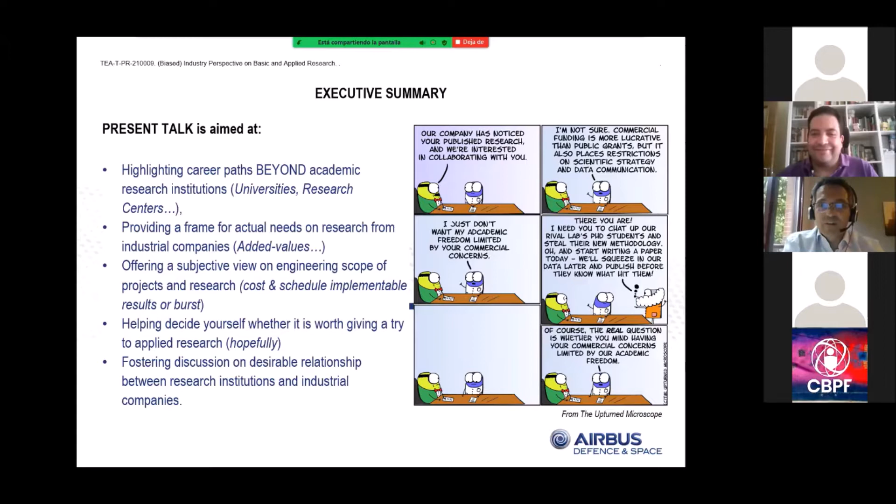That's more or less the different paths that seem to diverge when we're talking about research institution and private company research. Okay, so the talk itself has three main parts. First, it will be just a brief CV presentation from myself.

Later on we talk about Airbus, and Airbus, and Airbus—sorry for that, but the point is that I work in Airbus, and I'm proud of that. I want to share with you the experience of working for such a big and private company at the end.

The final part of the talk will just be a summary of the conclusions—again, personal conclusions, so it's very subjective, very biased. Okay, so let's start. Well, I'm 50 years old.

My professional experience is quite limited, because I've been working at Airbus since 2001. Now it's called Defense and Space Business Line. Before it was a division, before that a group, before that EADS. But at the end, it's the same company at all.

Before that, I did some 6 months after I finished my thesis, and I used to work at the Complutense University of Madrid as a technical researcher on railway EMC characterization, as Jose Miguel has already mentioned.

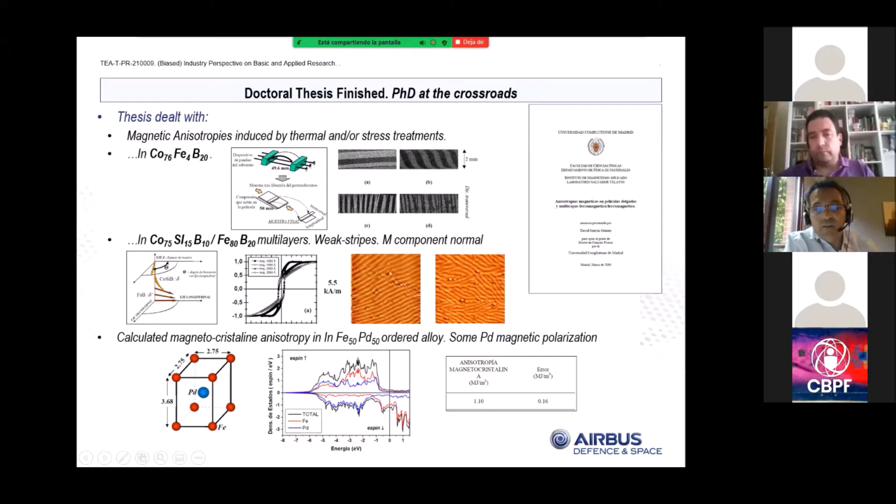After that, I can say that the period I spent there has been the most joyful years in my professional life, for sure, because of the people, the interest, the challenge, the travels, creating unique moments with very special people there, as you can see here, also in the audience, since they accompanied myself 20 years after that.

Once the thesis was finished, it was a period of uncertainty, and this uncertainty grew, and I had to make a decision about the future. There was a very limited time perspective that was, at the end, not very optimistic for continuing with the academic career. As I say, it was a pessimistic forecast on reaching an academic research career.

There was no clear postdoctoral position. I had just come back from France when I finished the thesis, so I was not in an easy position myself. And there was a personal feeling, by experience from other people, that there was a kind of non-correlation between academic merits and actual attainment of an academic position. That's hard, but it happens from time to time.

And the idea of jumping from one temporary contract to another in the near future didn't seem promising to me at that moment.

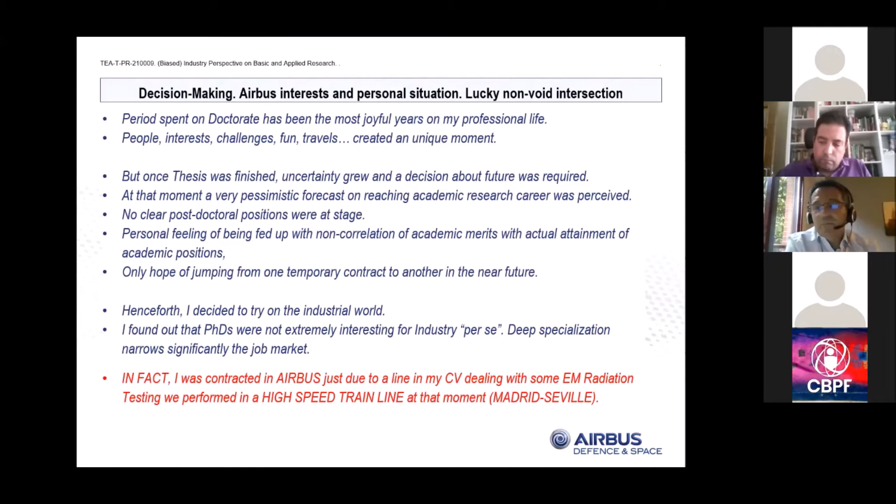So I decided to try the industrial world, thinking, well, I've got a doctorate in magnetism, extraordinary work, I will find a job very, very easily. The truth is it cost me 3 months at the end, but they were 3 difficult months.

What I can tell you is that PhDs are not extremely interesting for the industry per se, because at the end, this deep specialization narrows the job market.

In fact, as Jose Miguel has pointed out, I was contracted by Airbus just due to a line in my CV dealing with the electromagnetic radiation testing we performed on that high-speed train line. So, as I was saying, it was a lucky non-void intersection, and I started working at Airbus.

So let's talk about Airbus for a moment.

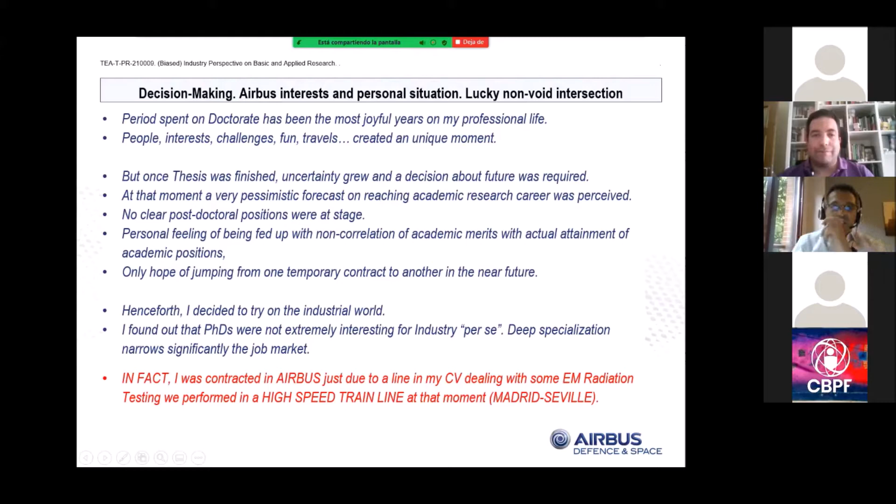Airbus is a big company that makes things that at the end fly in one way or another, in the atmosphere or beyond the atmosphere. These are the key figures of the company. It's for sure the largest European-based aeronautic and space company. It manufactures aircraft, helicopters, satellites, launchers like Ariane, electronics, security solutions, and services.

Workforce: we are more than 130,000 employees, 140 nationalities, over 20 languages spoken in the company, only one official language, which is English. World presence is 180 locations, and final assembly lines, the places where the final products are assembled and tested for flight and then delivered to the customer, are in Europe, America, and Asia.

As a summary of the company taken from the Airbus web page: more than 2,000 aircraft deliveries, around 2,000 helicopters also, a top 10 defense company, second largest aeronautical company in the world behind Boeing, self-financed research and development of 3 billion euros per year. We are committed to reducing CO2 emissions, and we've got around 30,000 patents. So, a big company at the end.

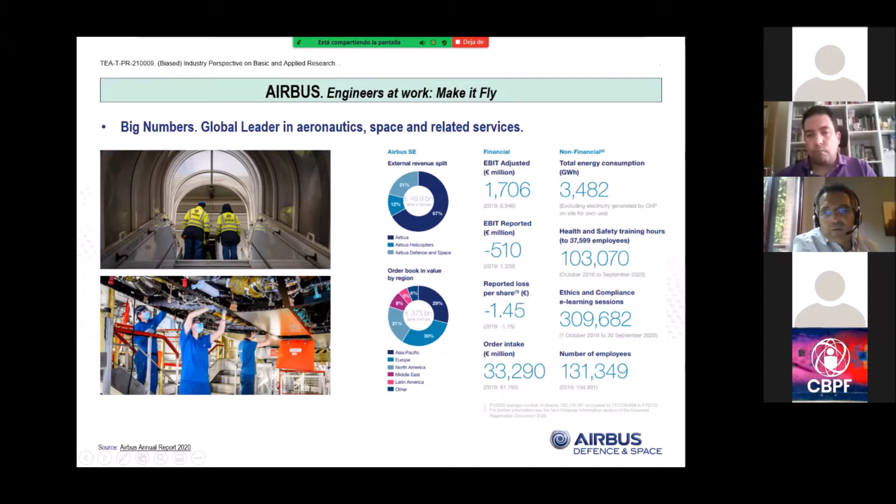There are three main lines of products within Airbus: Airbus Commercial, the big brother, let's say; Airbus Helicopters, 12%; and Airbus Defence and Space, where I belong, 21%. This is our market spread around the world.

Let's see the portfolio quickly. First is Airbus Commercial, which delivers all the transport category aircraft you are used to flying on, together with Boeing. These are the big families: the 220 together with Bombardier, the 320, 330, 350 which is new, and the 380. As you know, for the 380 we are not accepting any new requirements for new products.

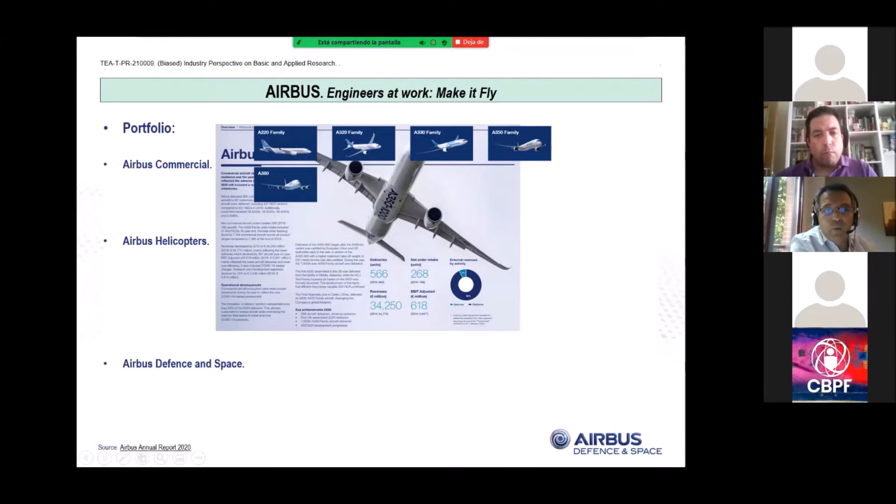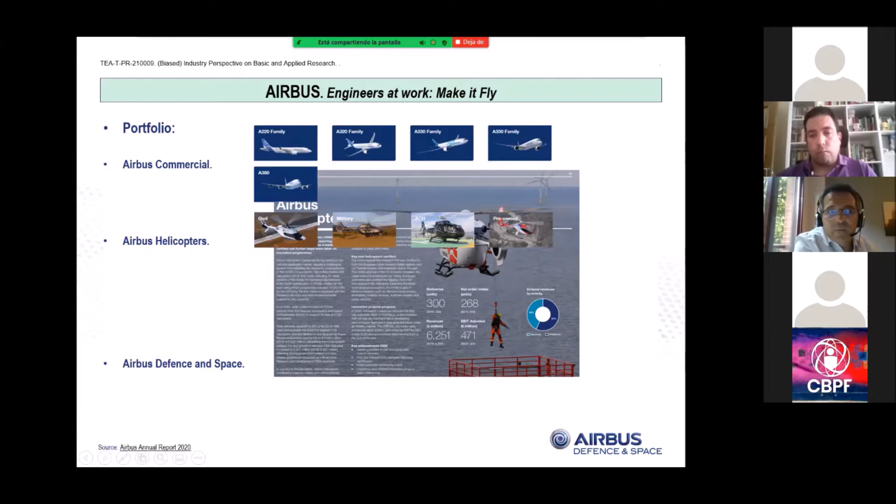So we are building just A380s that were already requested by customers. The Airbus Helicopter business line has produced civil, military, corporate helicopters, and has services associated with them. And Airbus Defence and Space, here you can see the Eurofighter.

These are the figures of the company. At the end, the portfolio is quite diverse: military aircraft, as you can see here, and security solutions, and system of systems approaches with the future FCAS program. And for sure you've got also different families of satellite production and services and equipment, and launcher products that we are developing. So this is the complete portfolio of the company.

Figures, I will go quickly through that. These are the revenues by each of the business lines. I want only to point out that our expenditure in research and development is around 3 billion euros per year, as you can see here.

On the business figures, you know it has not been a very good year, mainly for commercial aircraft, because of the decrease of traffic in general due to the pandemic. In helicopters and defense and space, we have more or less maintained the figures.

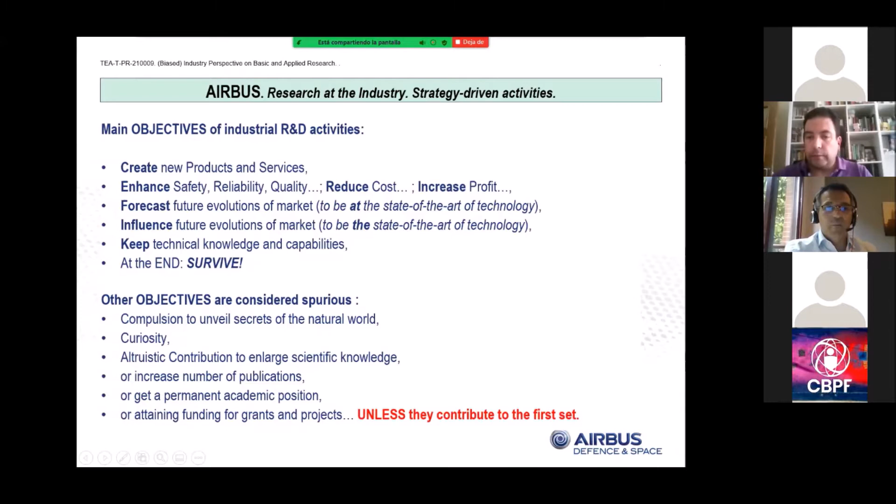Other objectives that are considered spurious include the compulsion to unveil secrets of the natural world, something very attractive from basic research, to understand why nature is as it is, curiosity, altruistic contribution to enlarge scientific knowledge, and other narrower objectives such as increasing the number of publications, getting a permanent academic position, or attaining funding for grants and projects. All these objectives are spurious unless they contribute to the first set, unless they contribute to the company's survival.

Also, this research in the industry is driven by the strategy of the company, but it also has some alignment with big values that are being developed and pursued in the long run, even at the UN forum, like fostering education, gender equality, decent work, industry, innovation, and infrastructure. For sure, maintaining peace, taking action on climate, being responsible, responsible consumption and production, recycling efforts, and all that.

So these are big words, what I mentioned up to now. But now let's focus on how we articulate that.

At the end, as any company with similar structure, we've got mapping of technology with road mapping, just to deliver and focus on planning the development of different technologies. This planning and road mapping are inputs, apart from inputs taken by the strategy of the company, and the needs and resources of the divisions. And at the end, they lead to several research lines.

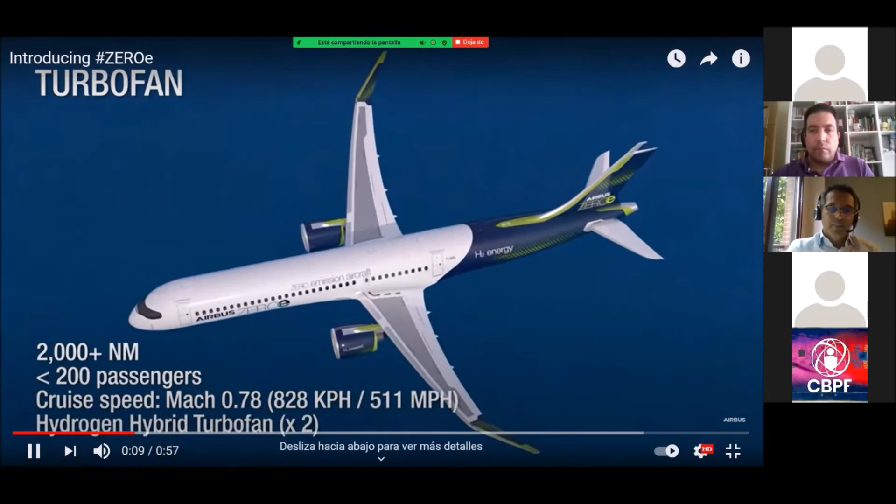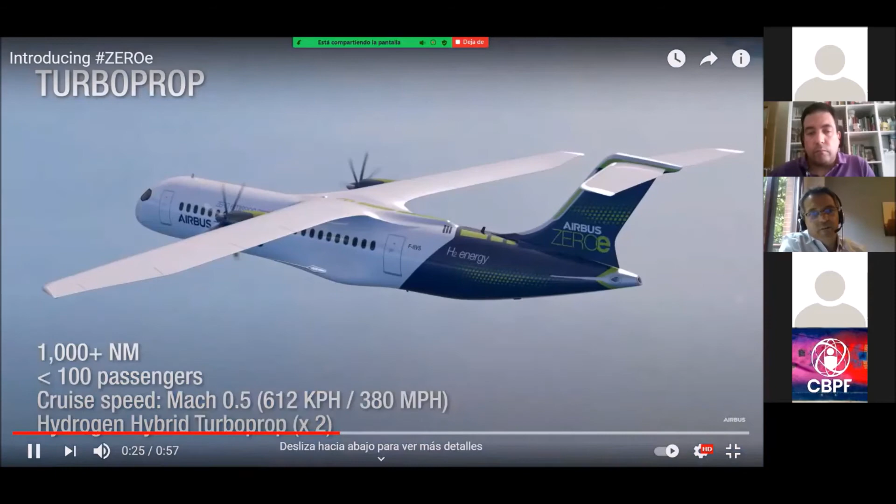These are different models that are being investigated. This is the roadmap for the use of hydrogen towards aircraft in the future. The different models are just being investigated now.

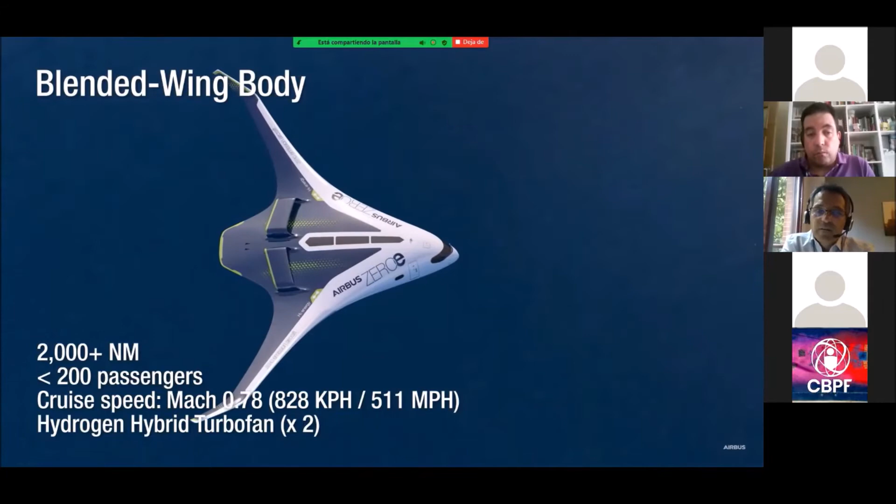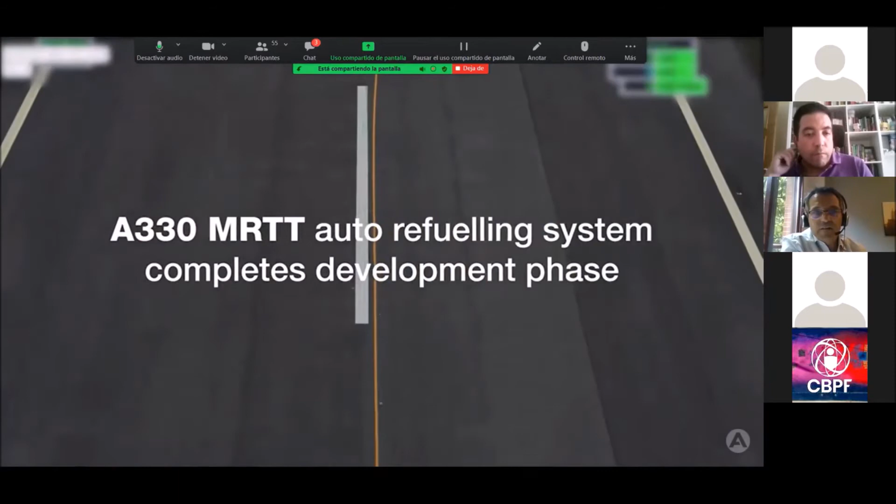Another example of research, focused on the division I work in, is what we call automatic air-to-air refueling. We build aircraft that are able to deliver fuel to other aircraft while in flight. This is what we call the A330 MRTT.

It has three positions to dispense fuel. One of them is the so-called boom system. What we have developed up to now is automatic recognition of the fuel receiver, making this operation fully automatic, increasing safety, either with big or small aircraft.

This is another example of a successful research and development initiative. We are just going to certify this year.

Okay, sorry for the music.

Now going to my personal experience. I don't want to bore you, just to the permissible amount. So...

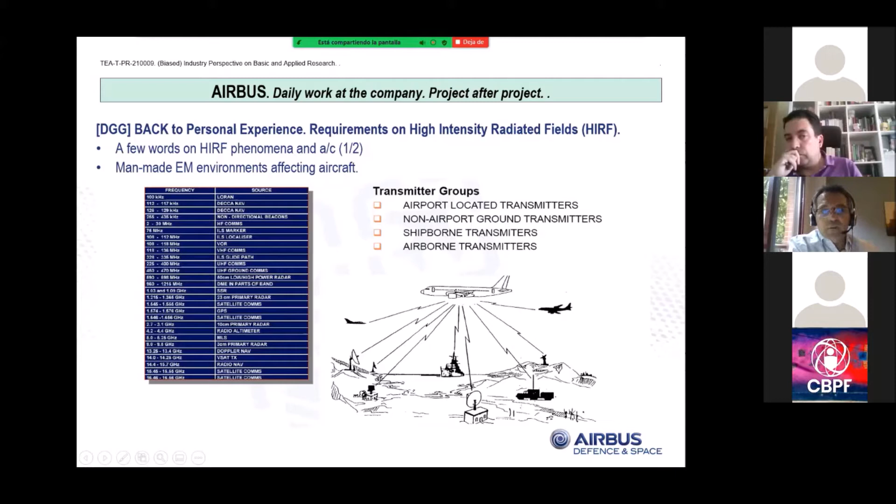This means flying safely whenever it is submitted to electromagnetic fields created by other aircraft, ships, terrestrial or ground stations, near the airport or out of it. To do that, you need to certify the aircraft can fly in a HIRF environment, which depends on the scenario the aircraft will be immersed in.

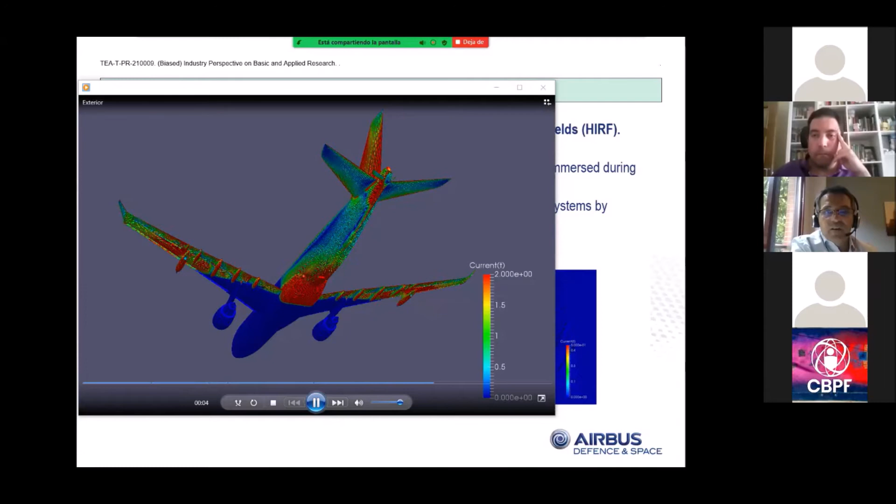At the end, we need to protect the aircraft from the currents that are induced along the structure and systems whenever an electromagnetic field approaches the aircraft. You can see here superficial currents produced by a plane wave illumination of the aircraft, seen from the exterior, and from the interior it's the same induction.

But here you can see cabling inside the aircraft, and you can see it also changes color, meaning there are induced currents in this cabling. These currents arrive at the equipment and can stress the proper behavior of the equipment by adding a noisy environment.

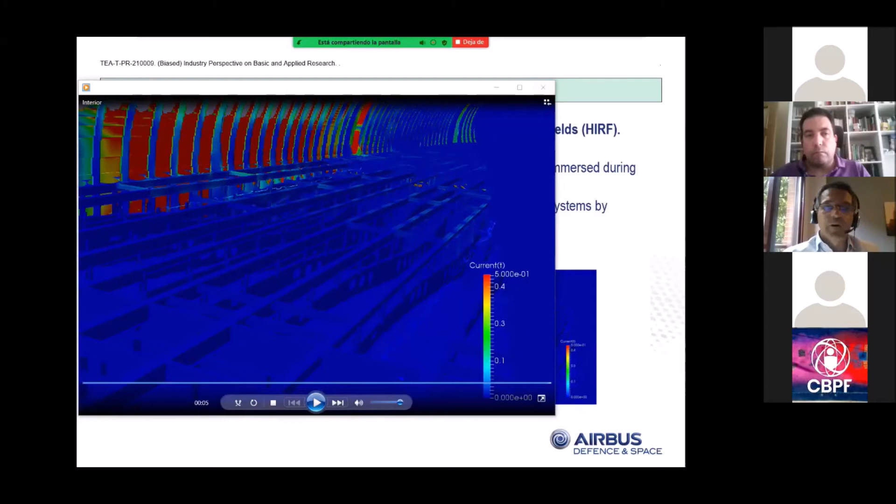Another thing more spectacular is the protection we need to provide to aircraft systems and structure against lightning. I'll say a few words about the lightning phenomena and its interaction with the aircraft. First, it seems an aircraft is a big, complicated system, but when you see this, you see how small an aircraft really is.

At the end, you need to protect the aircraft and make it robust enough to continue flying, as this aircraft does, even facing such a spectacular lightning impact.

Something we can say about lightning: it's mainly produced in thunderstorms, cumulonimbus clouds, where very dynamic processes with strong winds create a lot of friction between particles and form very different charge centers within the cloud that need to discharge somehow. The way they do that is through lightning.

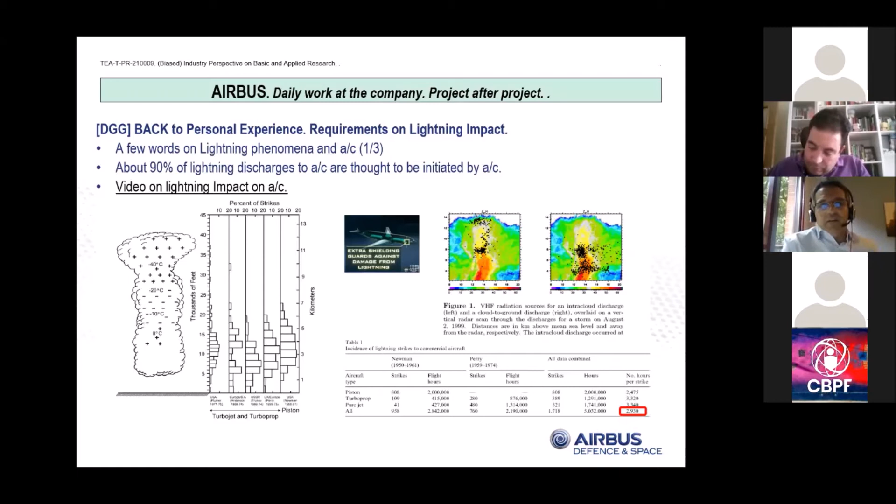Between Venezuela and Colombia, it's quite a funny phenomena, and a significant producer of ozone to the atmosphere. So to continue and finish with lightning, I would say that in order to design our aircraft and protect it against lightning, we need to put some numbers to the lightning phenomena, and these are the numbers we put to it. It's just curiosity for you to know, lightning for aeronautical engineering, something like that.

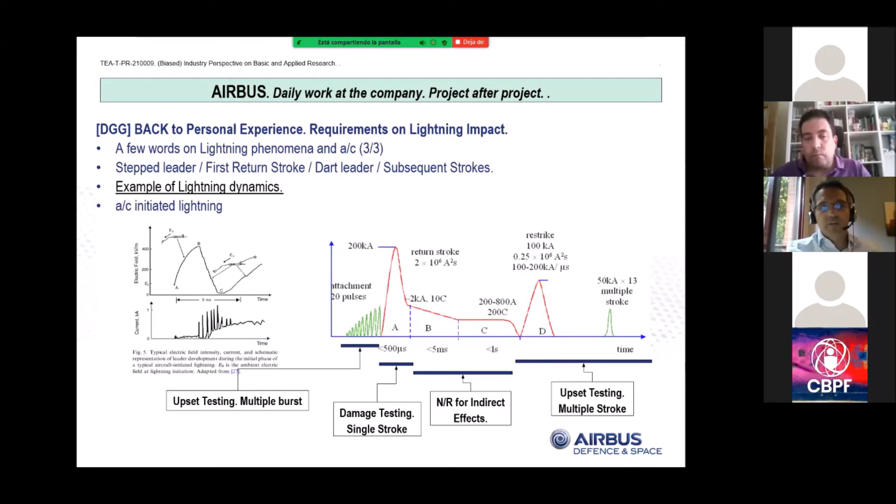We need these numbers in order to protect and design against this number, and to certify against this number with the authority. This is an example of the lightning dynamics, just for you to know.

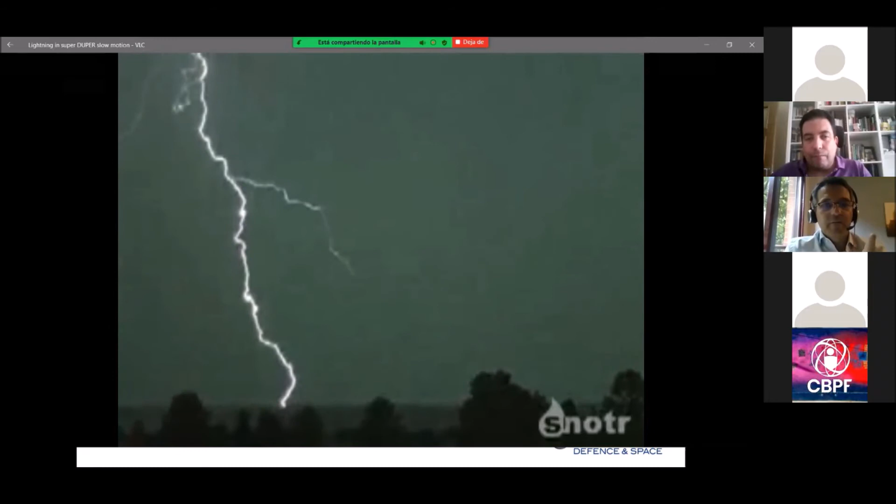There is an increase in the luminosity, which means that there are other charge centers that use the channel just to discharge. This is a lightning phenomena, and we need to put an aircraft on the picture, and design it just to withstand all this energy that is being transferred through the aircraft.

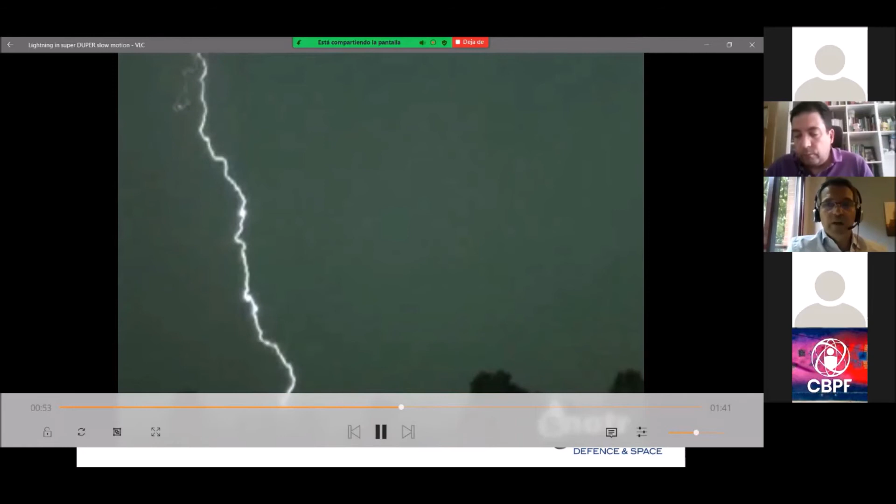What happens when a lightning hits an aircraft? Well, it can happen two things, what we call direct and indirect effects. Direct effects are all the damage produced by just the passing of the current through the lightning current through several parts of the fuselage, from one point, the entry point, to the exit point.

You need to be sure that you are not creating an ignition hazard for the aircraft, blown up with a full tank. For sure, they create very strong magnetic forces that tend to narrow together the distance between nearby conductors. And for sure, it does create hot spots and all this damage that needs to be repaired.

When you are using, instead of aluminum fuselage, carbon composite aircraft, which is less heavy than the aluminum aircraft, you need to protect it against serious damage of the carbon fiber itself, and you need to protect it with several metallic meshings, just to avoid creating some holes even in the structure of the aircraft.

And for sure, you need to protect this. You need to avoid the creation of electrostatic discharges at the end of certain points of the aircraft, mainly if these points are within the fuel tank. Okay, you don't want to have it. These are what we call direct effects.

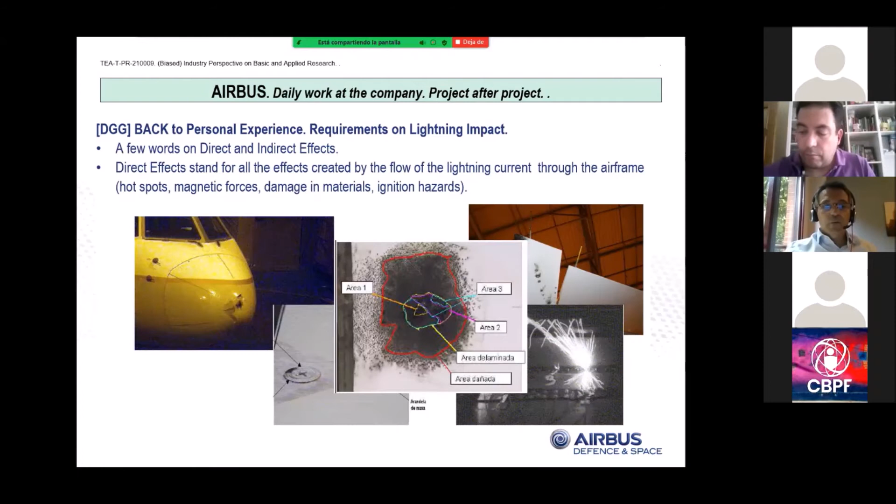In order to design properly the aircraft against this damage, what we do is identify the aircraft and divide it into different zones with respect to the probability each zone has of receiving the initial impact of the lightning. That's what we call zone 1, zone 2, or zone 3. Depending on the zone, you have to design in a proper manner for the structure to deliver, without any serious damage, this current from one side to the other side of the aircraft.

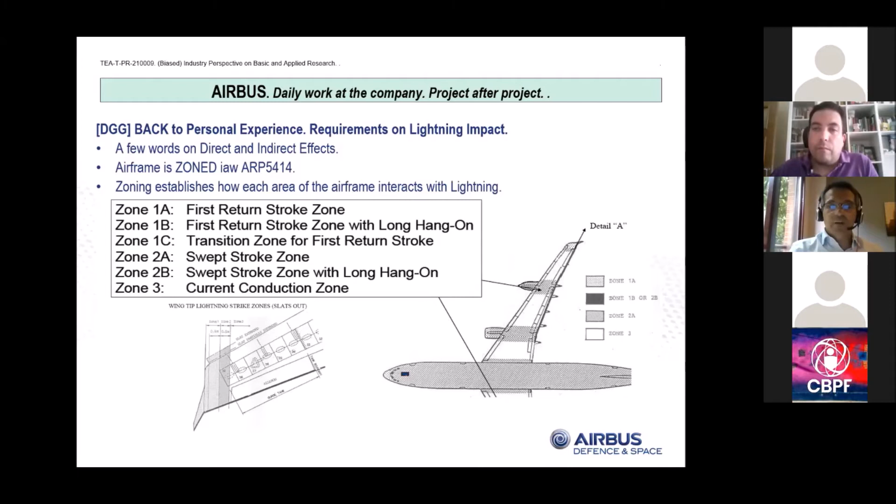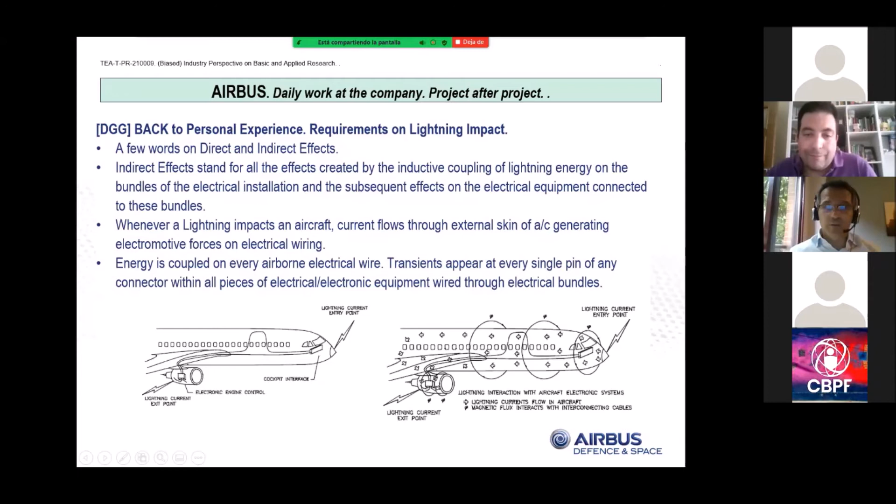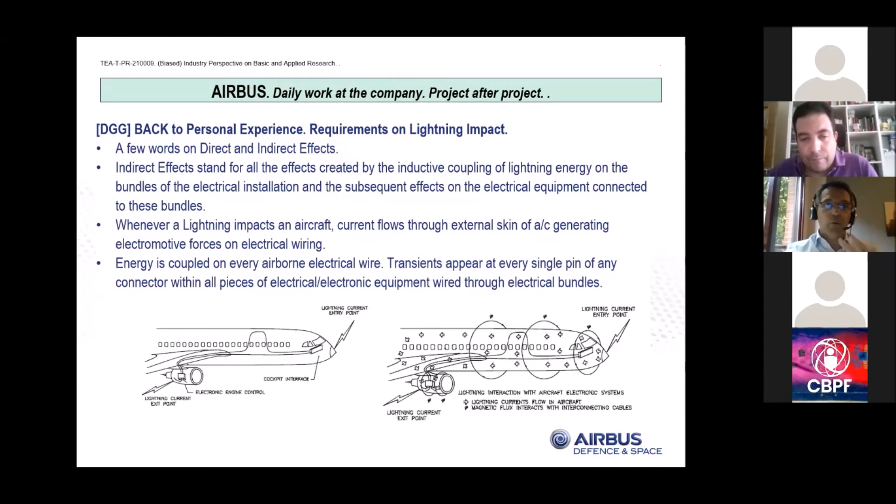Another thing about lightning is what we call the indirect effects, which has a lot to do with electromagnetic protection also. Indirect effects are created because of the very high induction that a quite fast changing current passing through the aircraft produces. Whenever lightning hits an aircraft, a very fast changing current passes through the fuselage. It creates a magnetic field that changes very quickly with time, and an electric field also, creating a very inductive source of noise into every single piece of electrical wiring in the aircraft. So at the end, you are producing a lot of electromotive forces within the aircraft, and you need to protect every piece of equipment against all the transients delivered to it because of the lightning impact. This is what we call the indirect effects.

Finally, I would like to talk about how we protect against portable electronic devices. Every passenger now carries electronics on board an aircraft, such as mobile phone, tablet, or laptop. There's the funny instruction to put the device in airplane mode or switch it off in certain flight conditions.

The people in charge of giving certain recommendations and limitations are ourselves in the electromagnetic protection area. You have to take into account, for example, a simulation of a GPS signal being produced within the aircraft, which through the apertures of the aircraft can produce interference on GPS receivers located around these areas. Having such an internal source of interference may cause the aircraft to be confused about where it's actually flying. So that's an important issue.

So what might be happening during safety briefing to passengers in commercial flights? Let's have a look at that.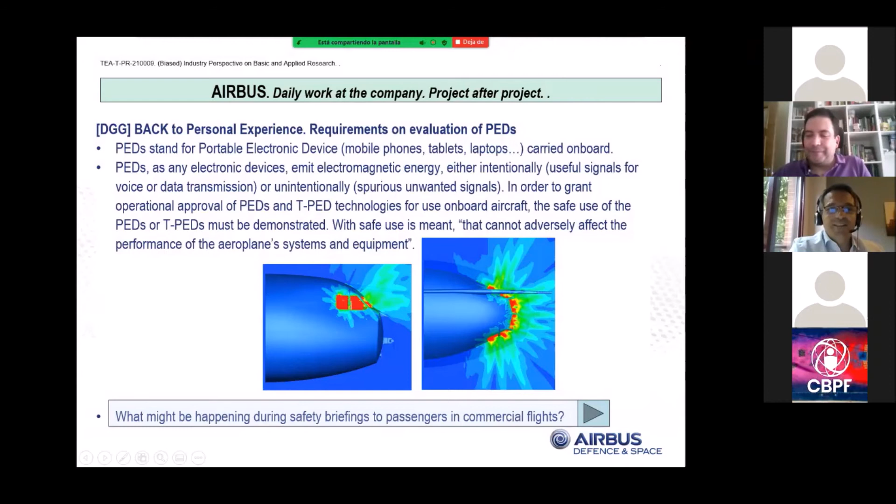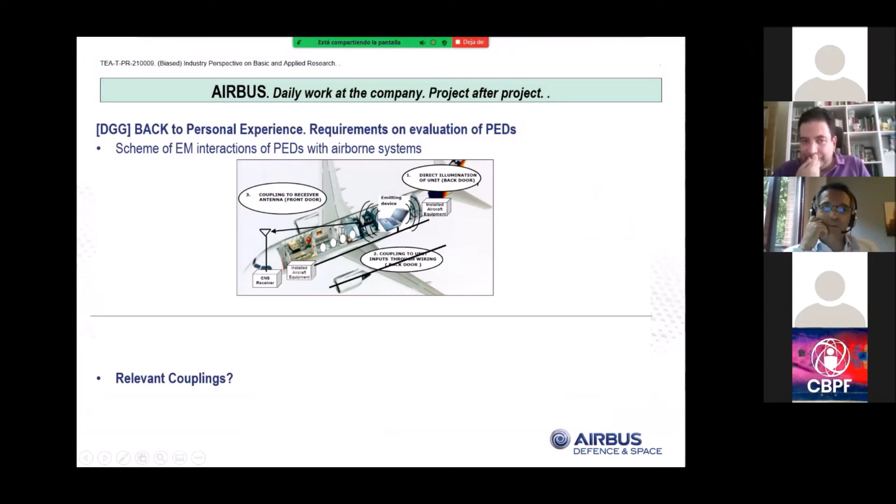Let's put it again. In order to check whether portable electronic devices affect our airborne systems, we divide the coupling it can have into front door and back door, meaning the front door stands for PED emissions and airborne victims.

The PED emission could be intentional, and they are intentional when we are talking about Wi-Fi, 4G, 5G, or whatever, or Bluetooth up to a point. These are intentional radiation from the PED that may affect the antenna of the aircraft.

Whenever the affected system is an antenna, we characterize that as front door coupling, because the antenna is designed to receive energy, even very small amounts of energy, for the equipment installed behind the antenna to process and make use of this information. So at the end we can have this kind of coupling, intentional radiation to antenna.

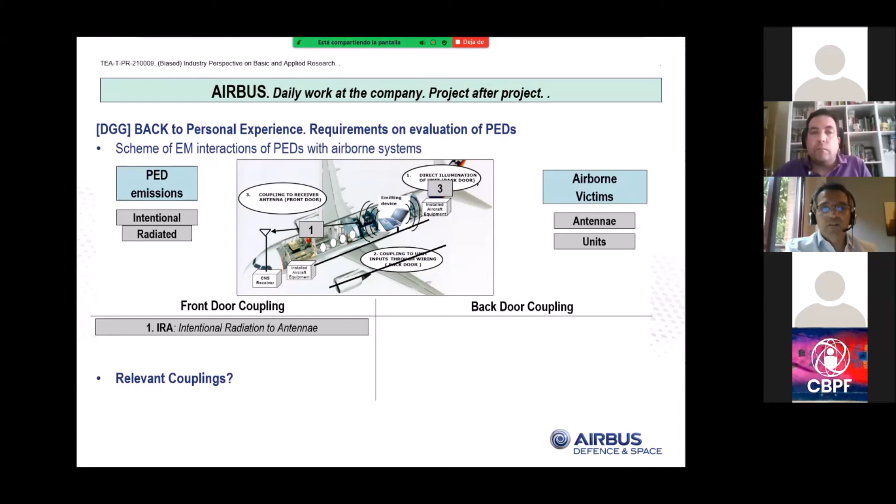If this intentional radiation goes to some units and equipment that has no antenna embedded or connected to it, we call it IRU, or if it affects cables, we call it IRC, okay?

If the PED emissions are non-intentional, that means whenever you put your phone on airplane mode, you are still emitting electromagnetic noise just because the equipment is functioning, is operating. But the amount of energy is much less. So this could be radiated and it can affect again the antenna, NIRA, the units, NIRU, the cables, NIRC, okay. So do we need to worry about all of them?

If your PED is connected just to power it up, to charge it, we only need to worry about these four things, because these are the ones that have more probability to produce any malfunction of the airborne systems.

The amount of energy involved in this phenomena is quite small, too small to consider them a real danger. So with these four potential dangers to the aircraft that we need to mitigate, there is one that does not apply at all, which is intentional radiation to antenna.

Why is that? Just because the frequencies used by portable electronic devices are quite different from the frequencies that airborne systems are able to transmit and receive. There is a world organization devoted to limiting and splitting the electromagnetic spectrum into different areas for different specific services. The aircraft services used for navigation, identification, and some radar systems work in a frequency spectrum that is limited to the aeronautical industry. So no portable electronic device can transmit within this frequency range.

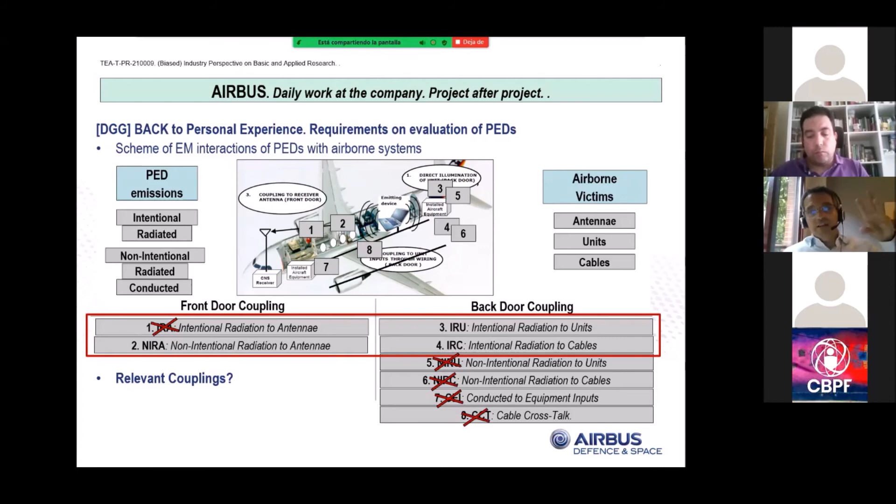However, this intentional radiation can affect units directly, or can affect cables. The non-intentional radiation, which is smaller in amplitude, could also affect the antenna, since it's designed just to receive and process very small amounts of energy. So from your mobile phone in airplane mode, you can affect an antenna in the aircraft. That's another representation of the same phenomena.

I don't want to go into that, but just so you know, the intentional radiation from transmitter portable electronic devices is around 10 volts per meter at 1 meter distance, whereas non-intentional radiation is about 100 times smaller, just 100 millivolts per meter.

Okay, that's concerning the technical work in the civil world.

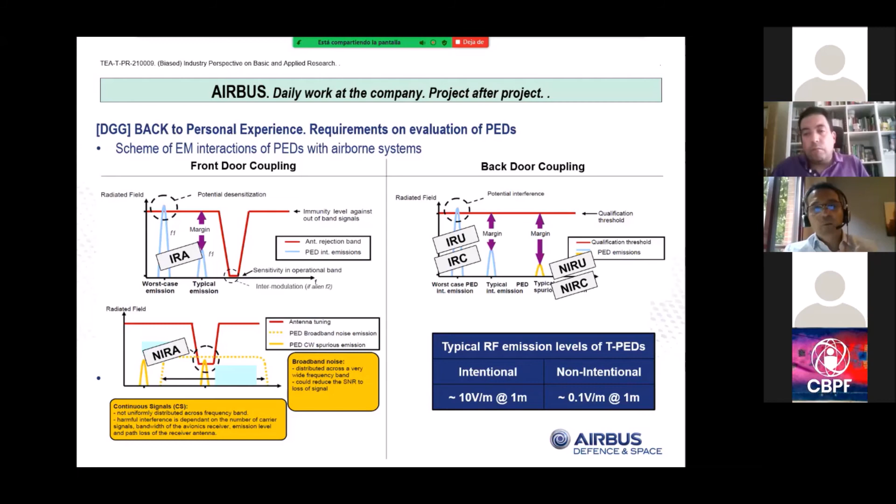On the military or defense aviation side, you also have to protect the aircraft against what we call hostile electromagnetic threats, since defense operations nowadays involve a lot of systems working together in a coordinated manner. In order to get all these systems coordinated, you need to transmit and receive a lot of information to and from them.

So at the end, the radio frequency environment has become an actual warfare tool and a battlefield itself. You need to protect your system from being jammed by hostile counterparts, so that you don't lose track of where you are, or get targeted by a radar or whatever. That's another big field of work in our discipline in defense and space.

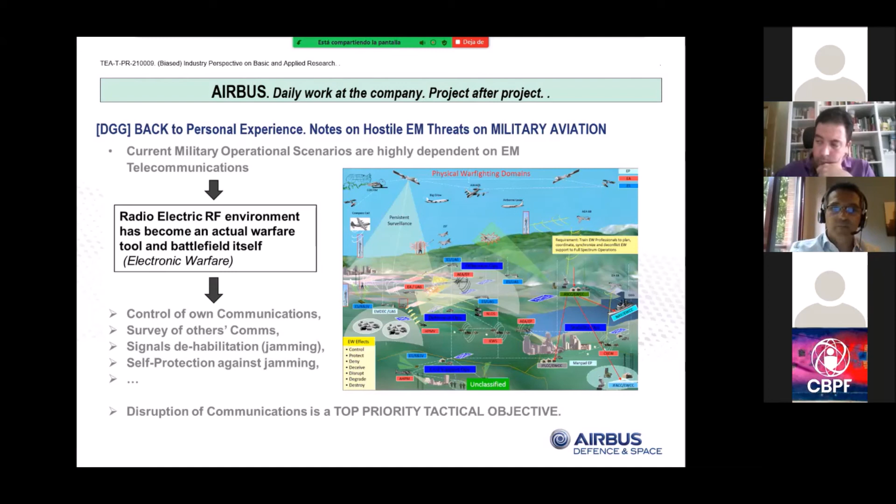Another example of hostile electromagnetic threats is the electromagnetic pulse itself. You know that an electromagnetic pulse could be of nuclear origin. It's a curiosity, but since it is, I'll tell you about it.

If a nuclear detonation is performed in the atmosphere, it produces a lot of gamma rays and ionization. What this produces, in the end, is a sweeping away of the external electrons of all the surrounding atmosphere in the blast area. This generates a lot of charged particles that whip away the nucleus of the atoms, creating ions on one side and electrons on the other.

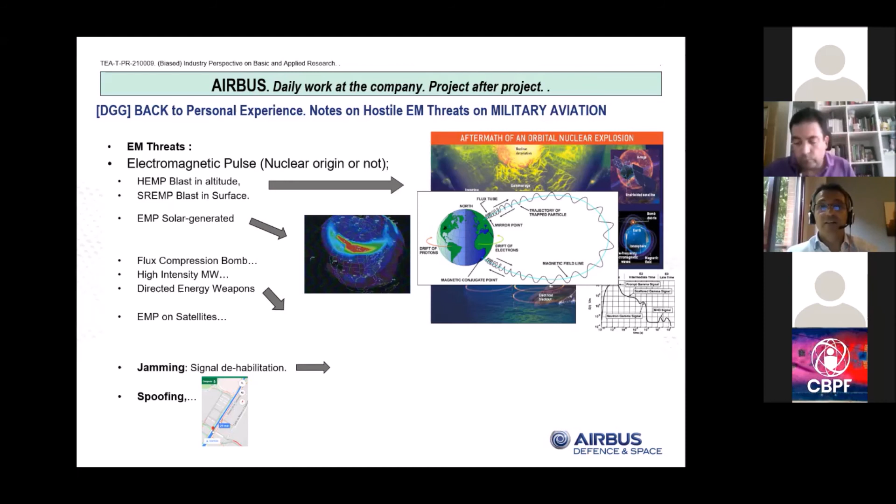These electrons have a lot of energy and move quite fast, and since they're moving within a magnetic field — the Earth's magnetic field — they start producing helicoidal trajectories. These helicoidal trajectories of free electrons flying around the atmosphere along magnetic field lines create very intense electromagnetic radiation, which is what we call the nuclear electromagnetic pulse. You need to be protected against that in the defense world.

Another example involves guns that are able to jam the signals of GPS receivers, data links of drones, or other equipment, causing them to fall off. That's talking about hostile electronic threats.

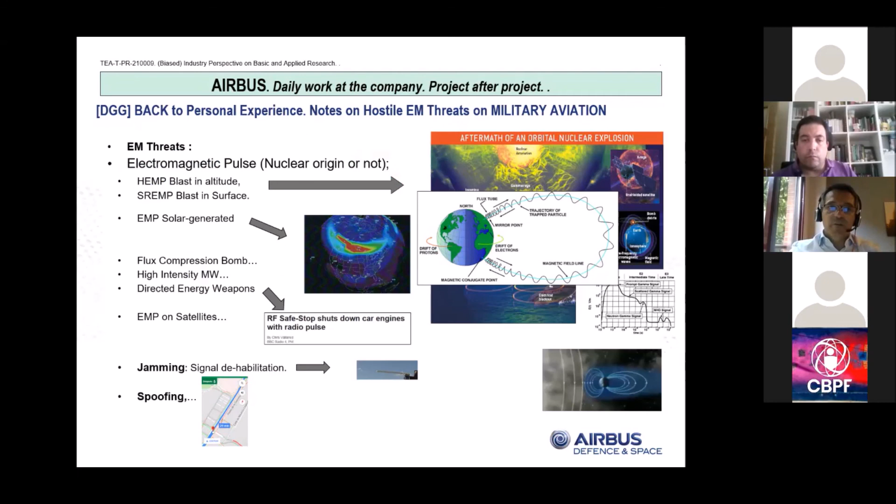And now, just to finish with this part, let's talk about — sorry, how much time do I have, Jose Miguel? I've gone over time, haven't I? Excuse me. If you can finish in, let's say, 5 minutes, that should be okay.

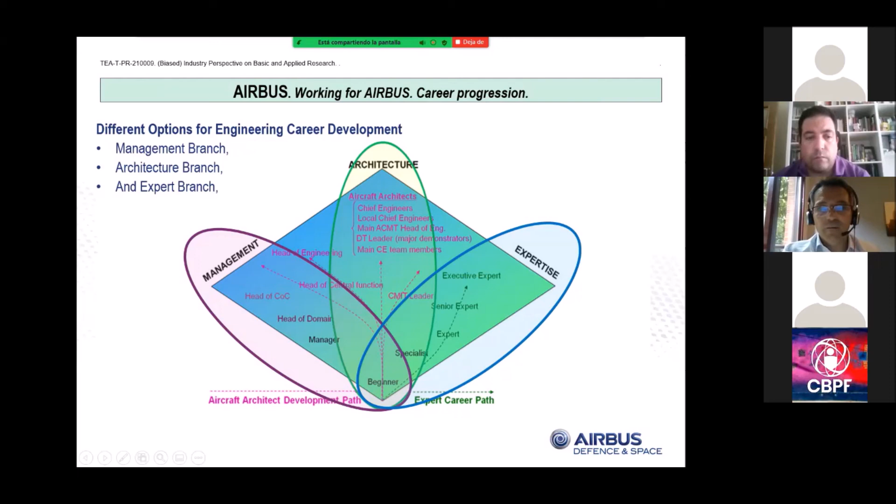Perfect. Okay, so talking about the technical career you can develop within Airbus, you can select either the management approach, the architecture approach, or the expertise approach, which is where I belong, in the expert career here.

The expert role within the company is defined as a person who has knowledge and skill in a field of competence that is important for the company. We are labeled as critical knowledge owners, and in order to be considered for such a role, you have certain accountabilities, rights, and duties.

Such roles involve growing expertise, proposing orientation for technical decisions, providing advice, cooperating with other domain specialists, disseminating knowledge, delivering expertise, and representing Airbus, which is the purpose of this talk.

As for expert rights, we have the right to investigate, to participate in conferences and working groups, and to represent Airbus externally. We have the right to be heard and contribute on technical issues, to take initiative on knowledge dissemination, and we have similar compensation benefits as other branches.

As for duties, we are a resource for the group, so we need to be available whenever the groups require us. We need to participate in and identify research and development, among other things. And at the end, we need to mentor people internally and create value for the customer.

Okay, very briefly I will talk about the soft skills that need to be developed within a big company such as Airbus, because the complexity of this engineering project requires contribution from a very wide range of organizations.

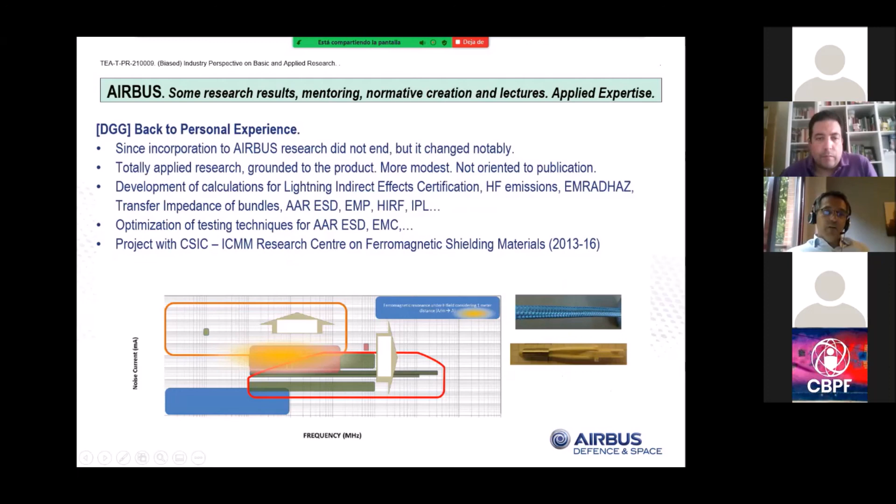There are some small projects we've had with the CSIC in the past, just with ferromagnetic material. The research didn't end, but it changed notably into some publications in some EMC conferences and publications from IEEE.

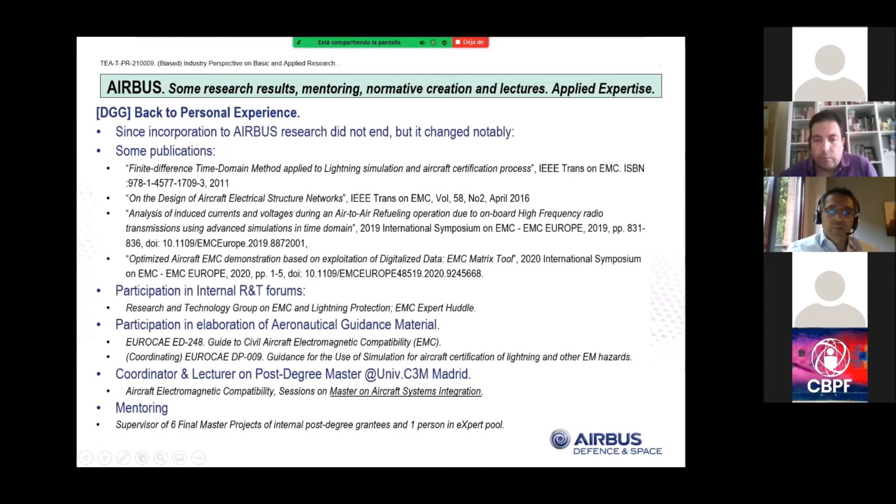Also participation in internal forums, research and technology forums, and I give classes in an internal master's program we have in collaboration with a university. We are also participating in the elaboration of guidance material for the aeronautical industry.

So, at the end, conclusions: what is missed from the research world? From the academic experience, the thrill of discovery, freedom to define your investigation, working on challenging tasks. You've got very beautiful work, to feel you're at the edge of something, to be able to explain behavior.

To conjecture, confirm, refute, question everything, and learn at every moment. But what is absolutely not missed? The insecurity of the academic world: long chains of grants, postdocs, temporary contracts, some kind of paternalism perhaps, or arbitrary managerial decisions, favoritism. I'm just talking about the limited experience I had in the past about this academic world.

So what is gained after abandoning the academic experience? Well, working in a collaborative environment is not exclusive to the company world, but here it's mandatory. To participate in the creation of complex systems, for sure financial security, labor rights.

You are accountable for your personal behavior. You can progress based on results and receive certain well-being care from the company. What is penalized? For sure, this is not a stress-friendly environment. It's running on and on to get to milestones, endless cycles, with more precise objectives.

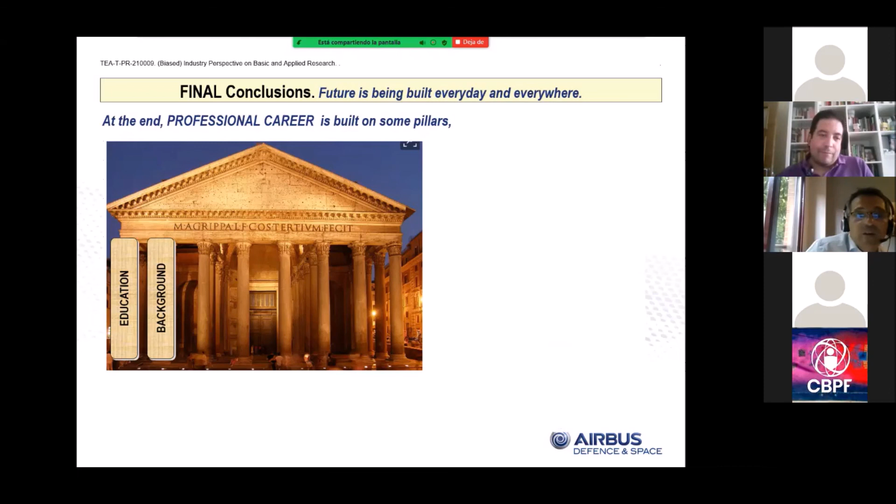At the end, just to finalize, your professional career stands on several pillars: your education and background, the commitment you could have, the decisions of other people, the good luck you could have, and unconscious choices you make in the past, timing, opportunity, and also bad luck.

So these are not completely under your control. So the only thing I recommend, and sorry for that, but it's something we see from time to time, is just to find your own Mount Stupid, let's say.

You are a very clever bunch of people, but it's true that this kind of behavior, mostly in the engineering world, is of course this way. Maybe you reach your own Mount Stupid whenever you are fully confident of yourself, your knowledge, your background, but you are not skilled enough to realize it.

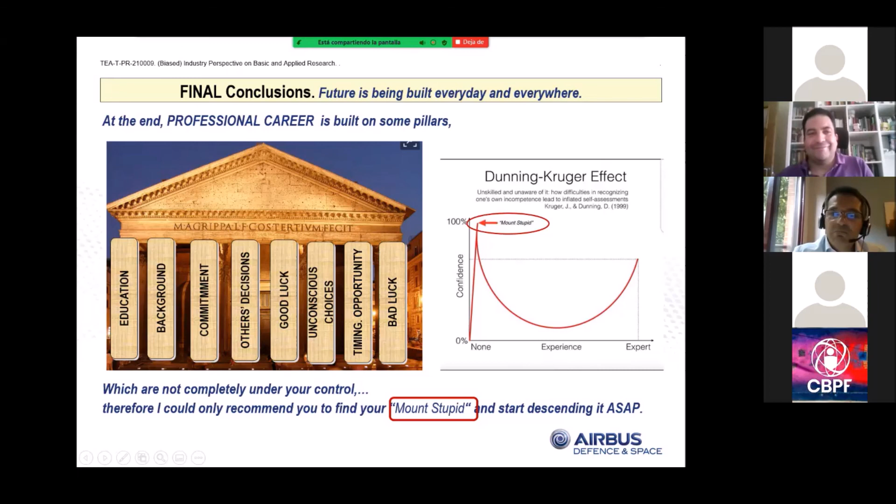Just to realize that you are not so skilled, and you need some path to run before reaching a certain level of confidence—again, more grounded. Sorry, that's all. Any questions?

After, I would say the commercial on the next page. So thanks a lot, and that's all, Jose Miguel. I can announce the IEEE conference if you want, or later on.

Sure. I'm clapping my hands on behalf of all attendees, and please do the commercial. And then we will ask you.